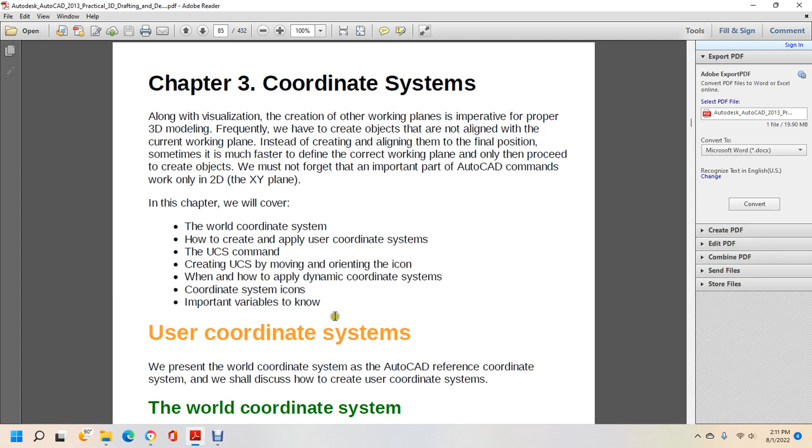The user coordinate system: we present the world coordinate system as the AutoCAD reference coordinate system. We shall discuss how to create the user coordinate system.

The world coordinate system, also known as World or WCS, is the reference coordinate system. It can never be deleted or modified, and all user coordinate systems are based on this one.

When we create an object, it will be internally defined with the world coordinate system, even if it is not the current coordinate system. The world coordinate system is also used for exporting 3D projects to other formats.

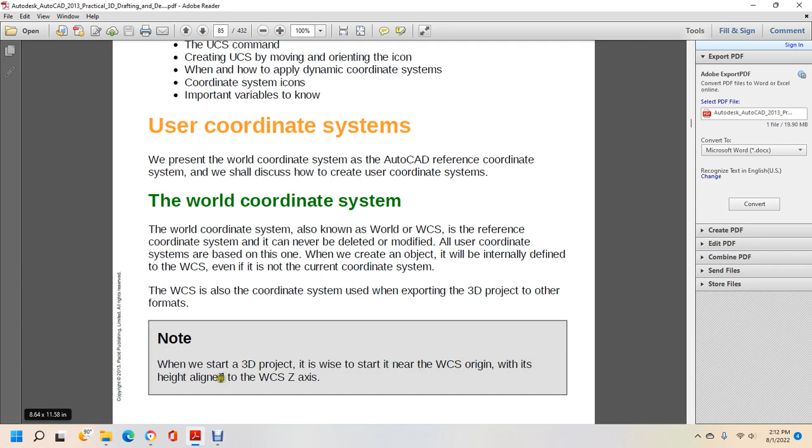Note: when we start a 3D project, it is wise to start it near the world coordinate system origin, with its height aligned with the world coordinate Z-axis.

Creating user coordinate systems. Following are important commands and variables related to the user coordinate system, also known as UCS or user coordinate system. The main command is aptly named UCS. The user coordinate system command has no alias, but easily allows you to create and manage a user coordinate system.

There are several options to the user coordinate system. You can access the user coordinate system toolbar by going to Tools, New User Coordinate System on the menu bar, with the Coordinates panel on the Home tab of the ribbon, or right-click on the User Coordinate System icon. The command can be seen with the command line informed of the current user coordinate system.

By default, it creates a user coordinate system defined with 3 points, starting with a new origin. The command is UCS. Current UCS named World. You can specify the origin of UCS, or options: Face, Name, Object, Previous, View, World, X, Y, Z, ZAxis, or World. Point.

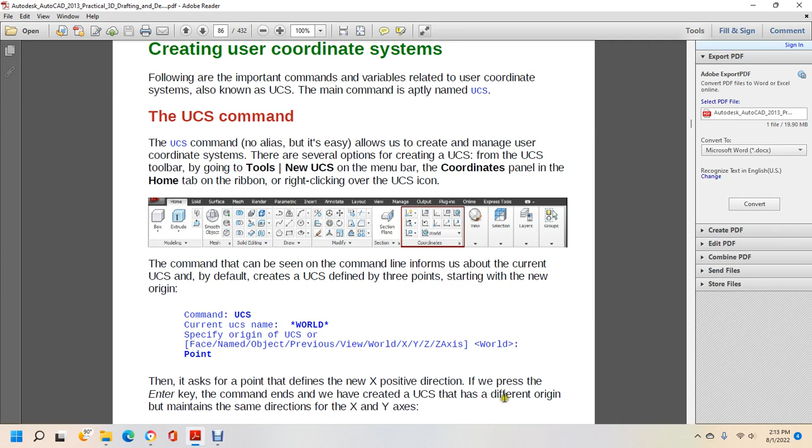Then it asks for a point that defines the new X positive direction. Pressing the enter key proceeds, and the command ends, creating a user coordinate system that has a different origin but maintains the same direction on the X and Y axis.

Specify point on X axis or accept. Point. When these two points are defined with the origin, an infinite number of planes are possible, so you need to specify a third point to define the X and Y working plane.

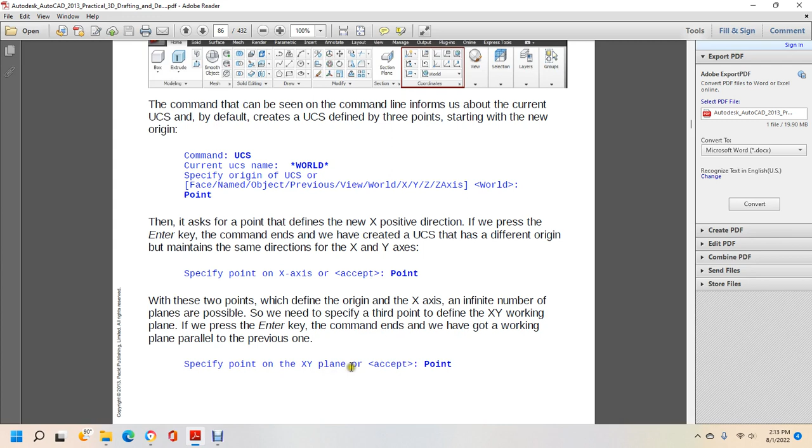If we press the enter key, the command ends, and we get a working plane parallel to the previous one. Specifying point on the X and Y plane, or accept point.

Now you see the world coordinate system: the X, Y, and Z is now positioned on the direction of the 3D triangle. We must be very careful when clicking on these points.

Be sure that the correct object snap is assigned. Working with a wrong user coordinate system that is not immediately detected can cause serious problems.

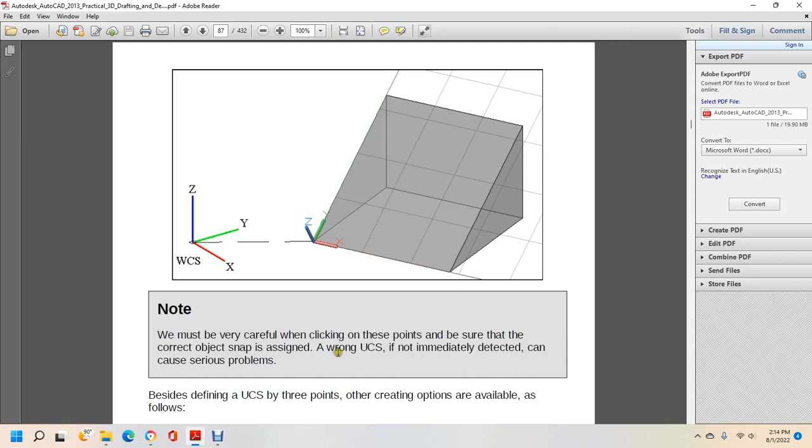Besides defining the user coordinate system by 3 points, there is another creating option: the Face variable, which allows you to create a user coordinate system aligned with any planar face, solid, surface, or mesh. We click inside the face and it will define a user coordinate system.

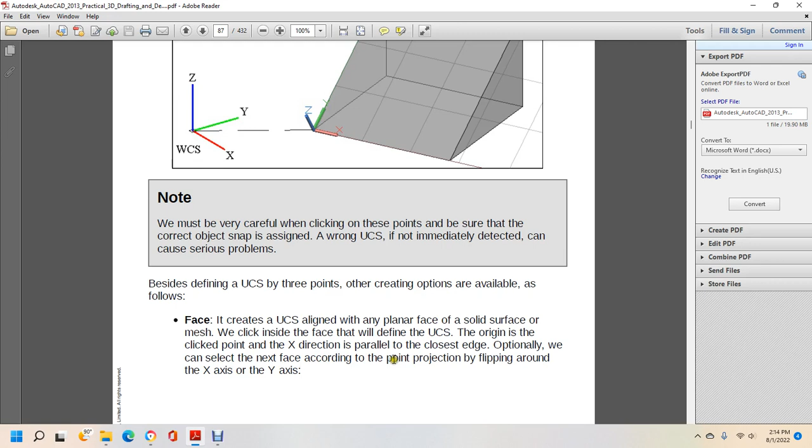The origin is the clicked point, and the X direction is parallel to the closest edge. Optionally, we can select the next face according to the point projection, flipping around the X or the Y axis.

Object creates a user coordinate system defined with the existing object. Selecting the line creates the user coordinate system parallel to the one used to create the line, with the origin at the endpoint close to the selection point, and the X axis given by the line.

View creates a user coordinate system perpendicular to the view direction, meaning the X and Y axis are aligned with the drawing area. The origin does not change.

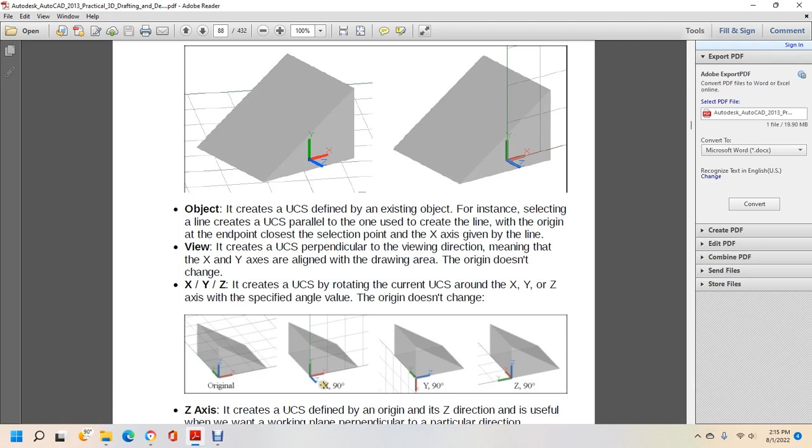Z-axis creates a user coordinate system defined by origin and Z direction, useful when we work on a plane perpendicular to a particular direction. Previous option activates the user coordinate system that was last used.

This option can be used successfully to recover the last 10 user coordinate systems. It's also possible to save and recover user coordinate systems by applying a name, with a new set of options.

Save, to save a user coordinate system - the name is requested. Restore, to activate a saved user coordinate system - the name is requested. Delete, to eliminate a saved user coordinate system definition. And question mark, to list all saved user coordinate systems.

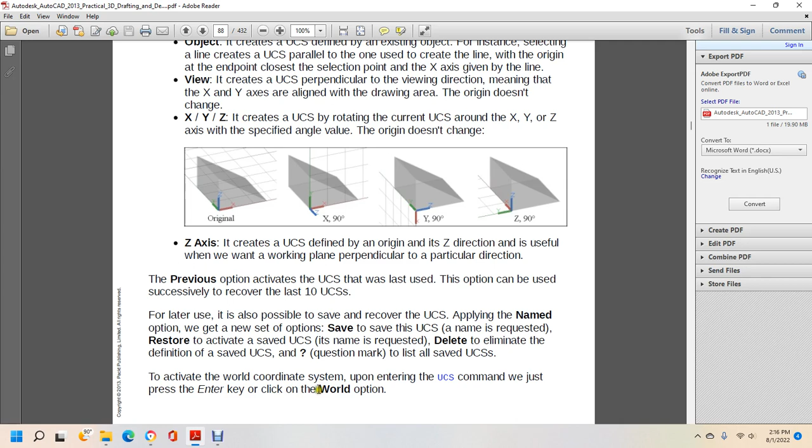To activate the world coordinate system upon entering the user coordinate system command, we just press the enter key or click the world option. Note this command has two hidden options.

Orthographic option allows activation of the orthographic user coordinate system related to the world coordinate system, obtained by rotating it and equipping the user coordinate system with the following options: Top, bottom, front, back, left, right - and top is the default.

Creating a user coordinate system by moving and orienting the icon. Since version 2012, it has been possible to create a user coordinate system by moving and orienting the icon directly, selecting the icon and four grips are displayed within the 3D view.

One grip is on the origin, and the other three are on the axis endpoints. With these grips, the coordinate system can be activated, moved, and dynamically created.

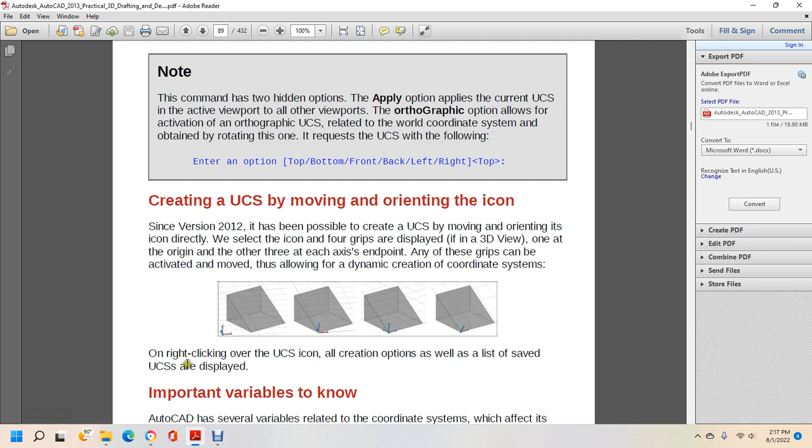Right click over the user coordinate system icon, all creation options, as well as listed saved user coordinate systems that are displayed.

Important variables to know: AutoCAD has several variables related to the coordinate system which affect its behavior when creating a user coordinate system or changing the view direction. Here are the most important ones.

User coordinate system follow, or UCSFOLLOW. On activation of a user coordinate system, the view changes to the respective plane view, keeping the value of UCSFOLLOW as 1. With a value of 0 by default, it is saved with the drawing.

User coordinate system viewport, or UCSVP. When working with more than one viewport, this variable allows for an independent user coordinate system per viewport at value 1, or only one UCS for all viewports at value 0. It has a default value of 1, saved in the drawing.

User coordinate system ortho, or UCSORTHO. It controls whether the corresponding orthographic UCS is activated, at value 1, or not, at value 0, when changing the view to an orthographic view. It has a value of 1 by default and is saved in the registry.

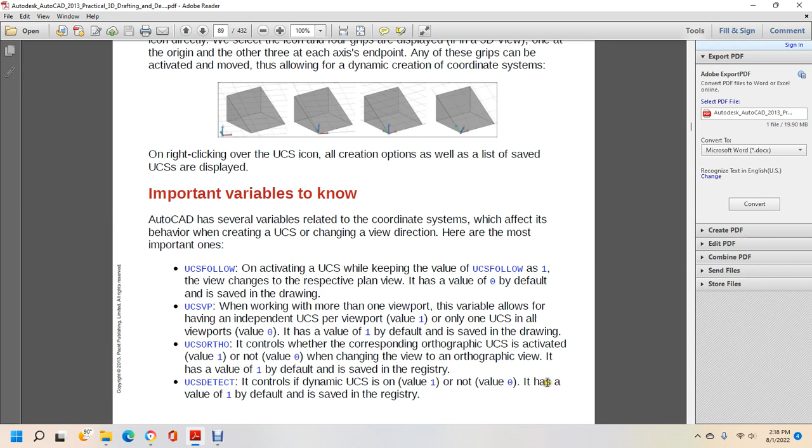User coordinate system detect, or UCSDETECT. It controls if dynamic user coordinate system is on, at value 1, or not, at value 0. It has a value of 1 by default and is saved in the registry.

User coordinate system select mode, or UCSSELECTMODE, controls whether the user coordinate system icon can be selected, moved, or oriented, at value 1, or not, at value 0. It has a value of 1 by default and is saved in the registry.

Exercise 3.1: while drawing some linear objects on different planes of a 3D model, open the accompanying file A3D_03_01. This part's planes are not aligned with the world coordinate system. Create a user coordinate system aligned with the front face.

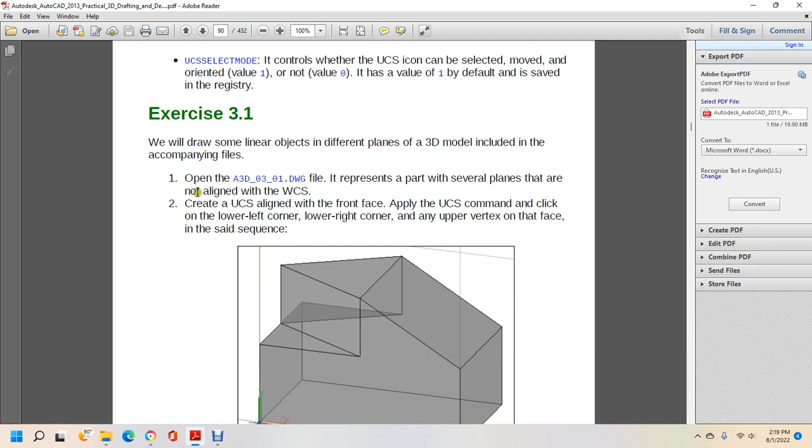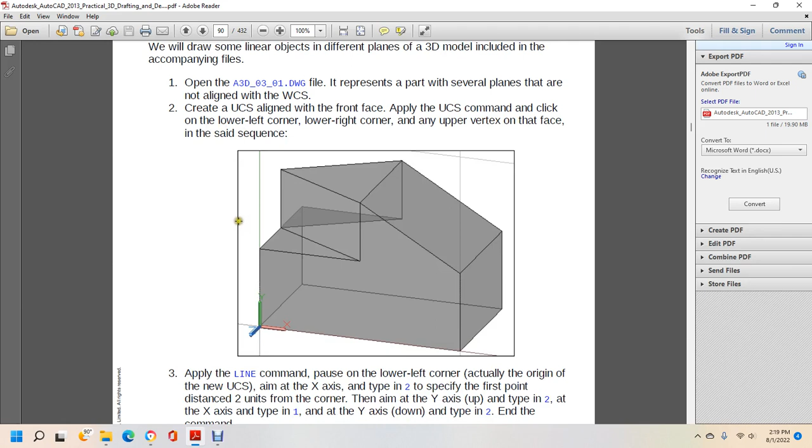The user coordinate system command. Click the lower left corner, the lower right corner, and the upper corner on the face in that sequence. Apply the line command. Pick the lower left corner, the actual origin of the new user coordinate system.

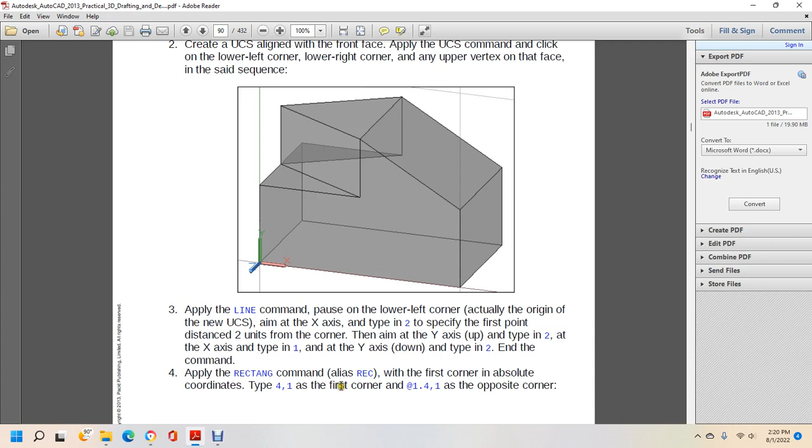Aim the x-axis, type in 2, specifying the first point at a distance of 2 units from the corner. Then aim the y-axis up and type 2. At the x-axis, type 1, and y-axis down, type 2. Then apply the rectangle command, alias REC, with the first corner at absolute coordinates 4,1 and the opposite corner at @1.4,1.

Create the user coordinate system aligned with the right face again using the 3 points. Apply the rectangle command to create the rectangle from 1,1 absolute coordinates to @4,1 relative coordinates. Now activate the user coordinate system icon, position and orient it with the top inclined face by moving the grips. Users of versions older than 2012 should apply the user coordinate system using the 3 points again.

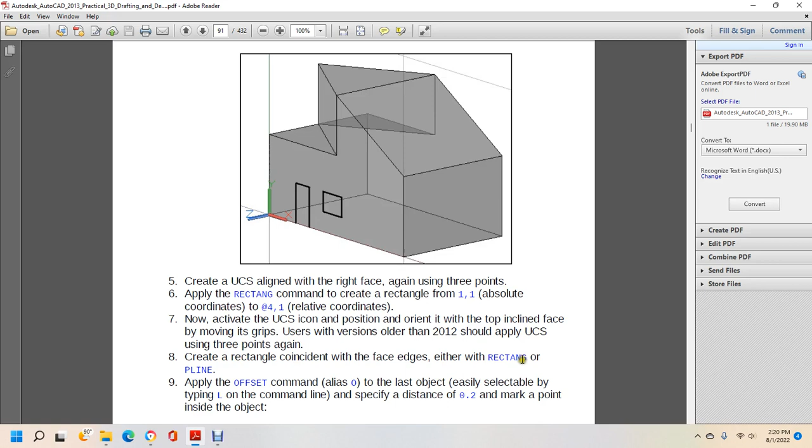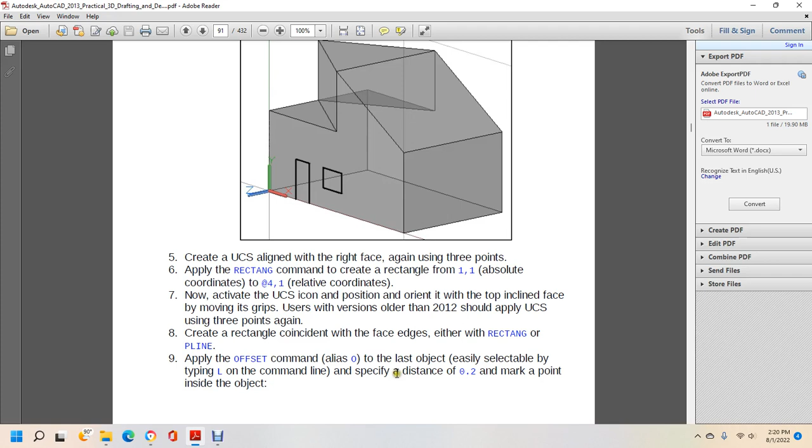Create a rectangle coincident with the face edge with the rectangle or the polyline. Apply the offset command, alias O, with the last object, easily selectable by typing L on the command line. Specify the distance as 0.2 and mark a point inside the object.

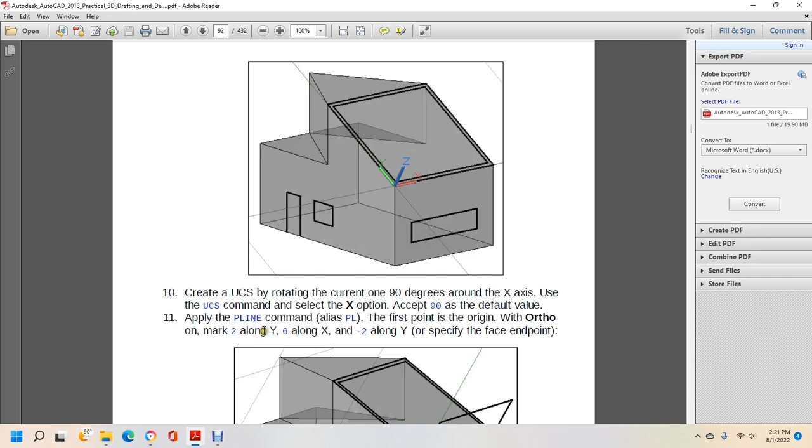Create the user coordinate system rotating the current one 90 degrees around the x-axis. With the user coordinate system, select the x option, accepting 90 degrees as the default value. Apply the polyline command, alias PL, for the start point at the origin, with ortho on. Mark 2 along the y, 6 along the x, and then -2 along the y, on the face endpoints. Save the current user coordinate system with the name top perpendicular.

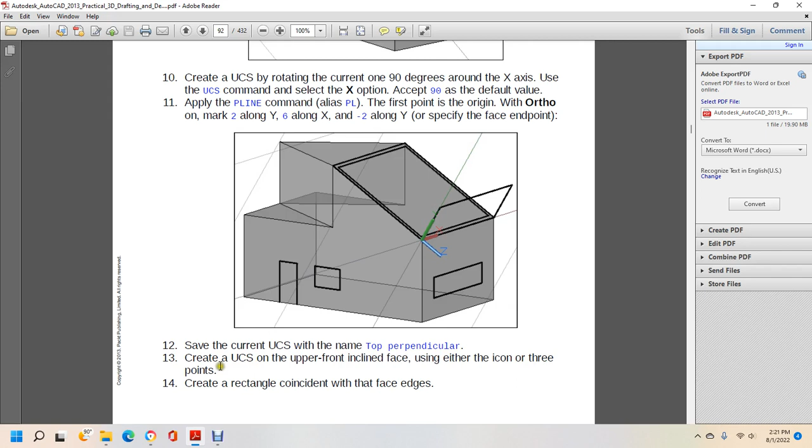Create the user coordinate system on the upper front inclined face. Use either the icon or 3 points. Create a rectangle coincident with the face edge. Apply the offset command, alias O, last object. Specify the distance as 0.2. Mark a point inside. Do the same with the upper posterior inclined face.

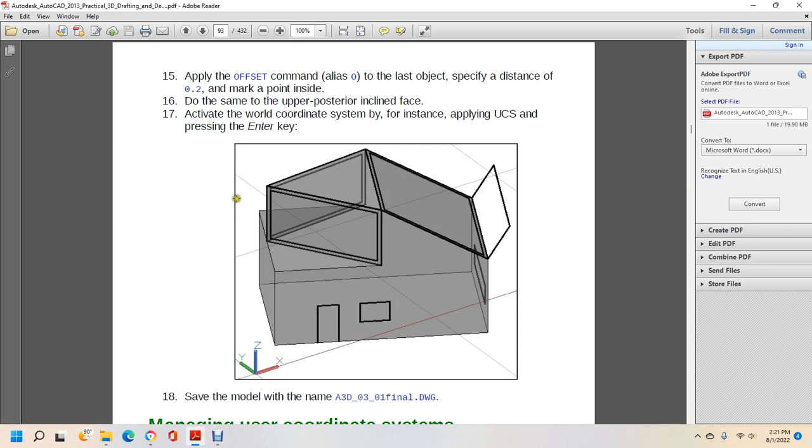Activate the world coordinate system, for instance applying the user coordinate system command and pressing the Enter key. Save the model, renaming it A3D0301 final drawing. Managing the user coordinate system.

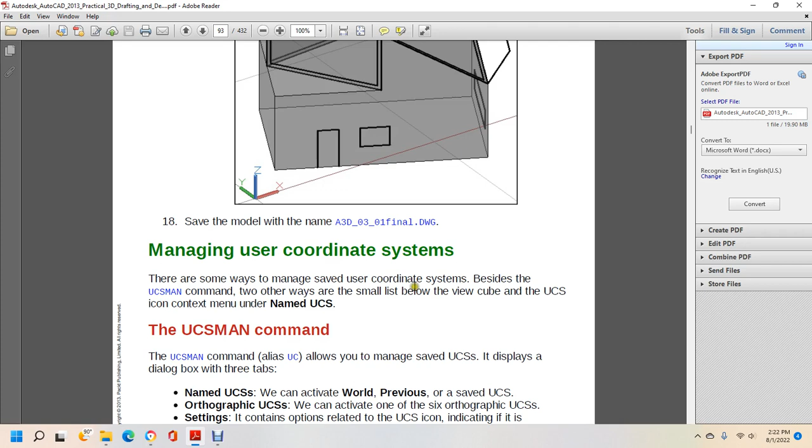There are some ways to manage saved user coordinate systems besides the UCSMAN command: the UCS manager command. Two other ways are the small list below the view cube and the user coordinate system icon context menu, named UCS, or the UCS manager command, UCSMAN.

The user coordinate system manager, alias UC, allows you to manage the user coordinate system display with a dialog box with 3 tabs. Named UCSs: we activate the world, previous or saved user coordinate systems. Orthographic UCSs: we activate one of the 6 orthographic user coordinate systems. Settings:

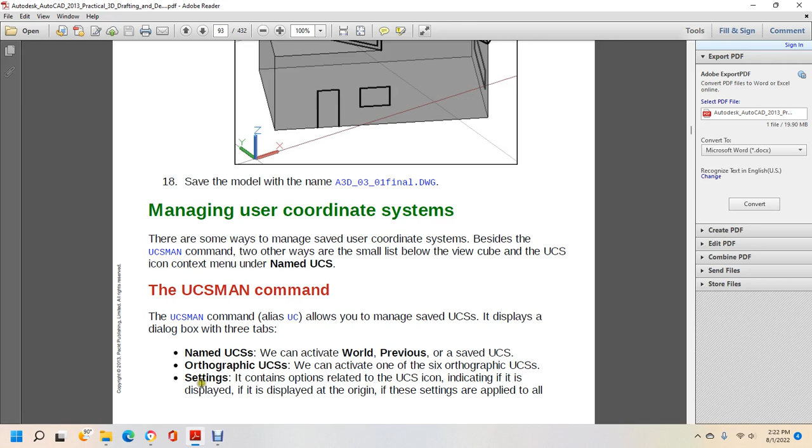we can change the display options related to the user coordinate system icon, indicating if it displays at the origin, if the settings are applied to all viewports, and if it is selectable. It also contains 2 options related to the user coordinate system: saved with the viewport, and whether the plan view is activated when changing the user coordinate system.

Dynamic coordinate system. Since version 2007, an auxiliary tool is available for creating objects on a solid planar face: creating a dynamic coordinate system. The dynamic user coordinate system tool is activated during the creation of a 2D or 3D object when you move the cursor over a solid planar face. The face is highlighted and AutoCAD creates a temporary working plane on the face; at the end of the command the temporary user coordinate system disappears.

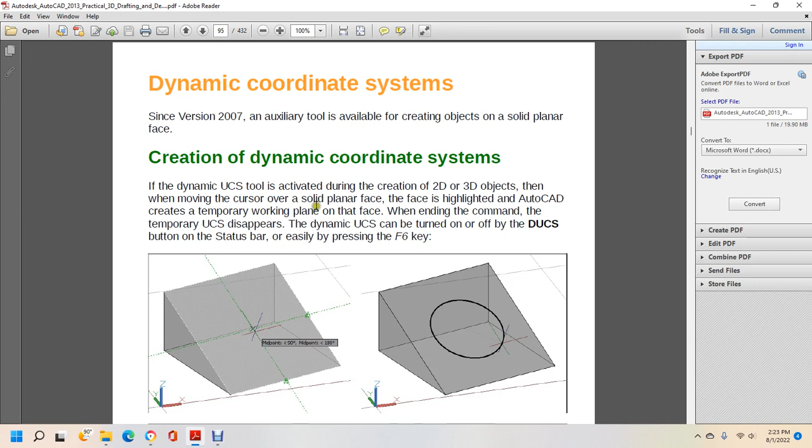Dynamic user coordinate system can be turned on and off with the DUCS button on the status bar or easily by pressing F6. Note, normally the object positioned on that plane is not precise in distance from an edge or a vertex. One way to have precision is to turn on OTRACK, then pause over one of the object snaps in the direction of the cursor.

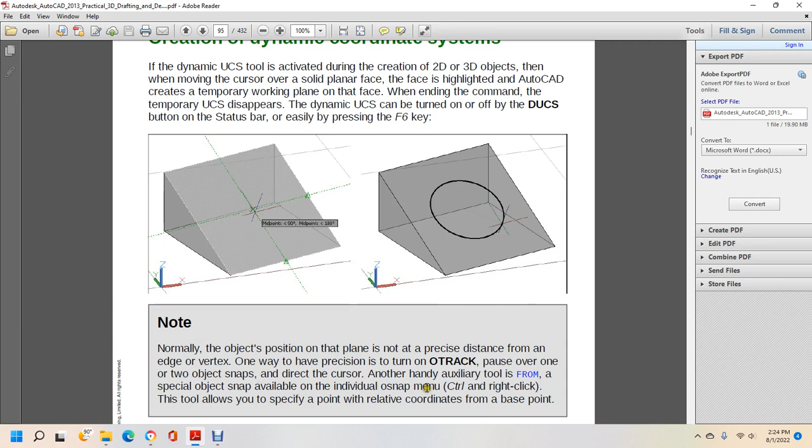Another handy auxiliary tool is the FROM special object snap, available with the object snap menu, Control right click. This tool allows you to specify a point relative to coordinates from a base point.

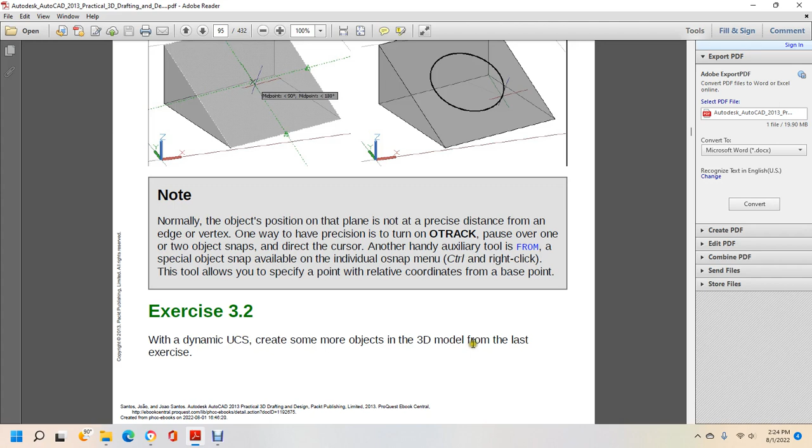Exercise 3.2. With dynamic user coordinate system, create some more objects on the 3D model from the last exercise. Open the A3D_03_02.DWG file. Turn on dynamic user coordinate system. Create the circle and the rectangle on the front and left face. Create the square of side 1 on the upper inclined face, with the lower left corner offset from the inner rectangle 2 units horizontally and 1 unit vertically.

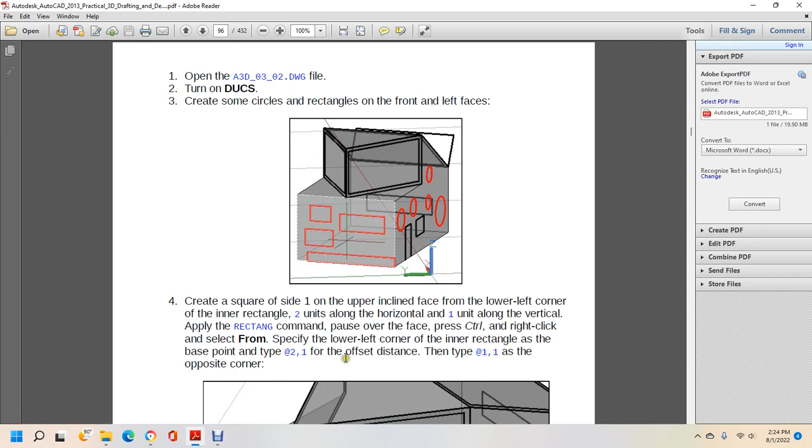Apply the rectangle command, pause over the face. Press Control right click and select From. Specify the lower left hand corner of the inner rectangle as the base point, then type @2,1, 2 in X and 1 in Y for the offset distance. Type @1,1 as the opposite corner. There is no need to save the model.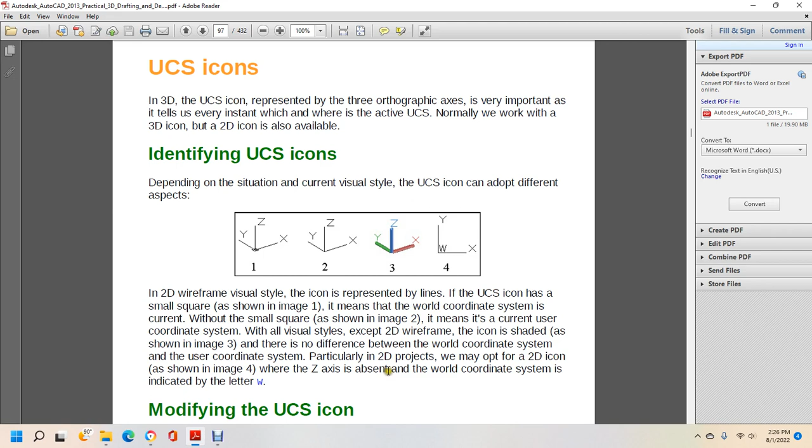Particularly for 2D projects, we may opt for the 2D icon as shown in image 4, where the Z axis is absent and the world coordinate system is indicated with the letter W. Modifying the user coordinate system icon. To modify it, we can apply the UCSICON command. It has the following options: On and Off turns the icon visibility on and off in the current viewport. All applies the visibility and origin settings to all viewports.

Noorigin or Origin controls display of the icon at the coordinate system origin. If the origin is not visible in the current viewport, the icon is displayed at the lower left-hand corner. Selectable specifies whether the user coordinate system icon is selectable or not. This option is available in the 2012 version.

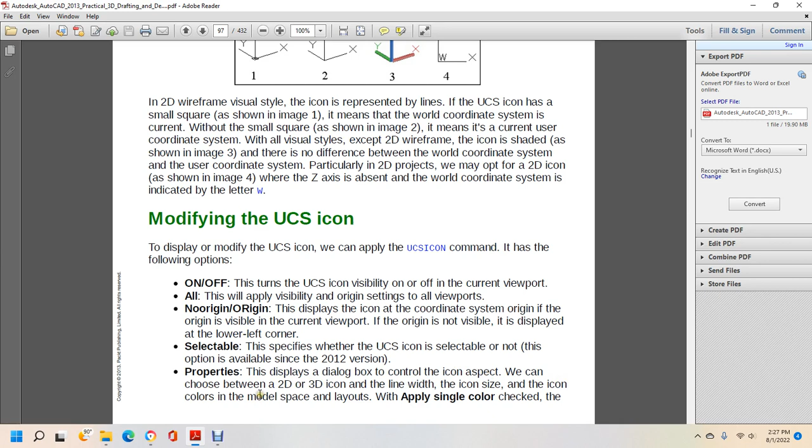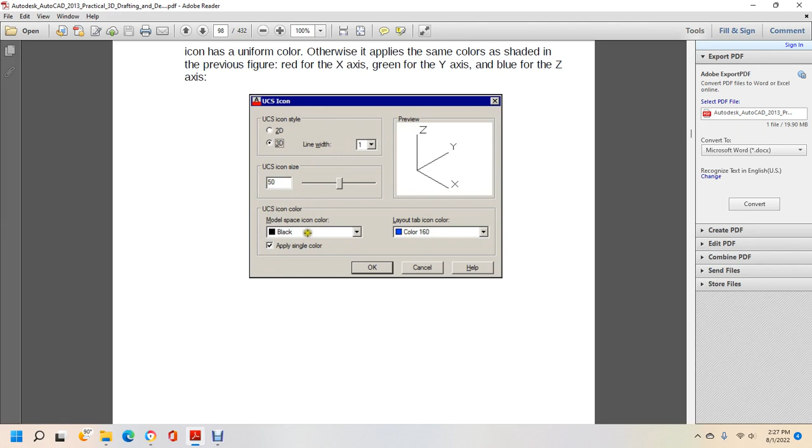Properties displays the dialog box to control the icon aspect. We can choose between the 2D and 3D icon, the line width, the icon size, the icon colors in model space and layouts, and apply single color. If checked, the icon has a uniform color, otherwise it is shaded as in the previous figure, with red for the X axis, green for the Y axis, and blue for the Z axis. This shows the UCS icon dialog: 2D, 3D, line width, icon size, model space color, layout color, apply single color, OK, Cancel, or Help.

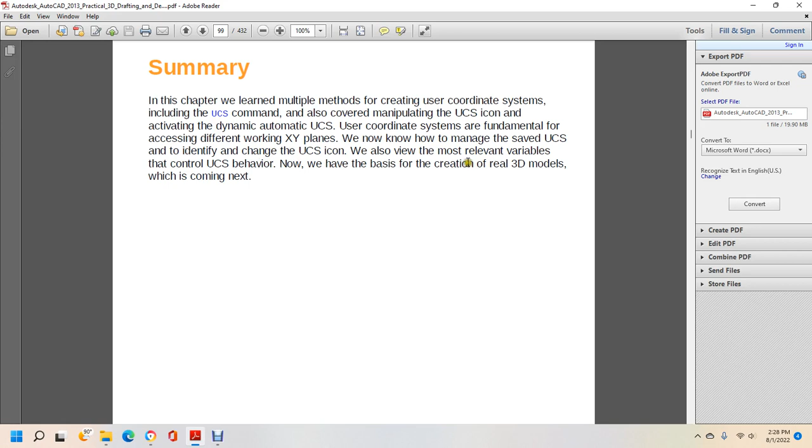Summary. In this chapter, we learned multiple methods of creating user coordinate systems, including with the UCS command. We also covered manipulating the UCS icon and activating the dynamic UCS. The user coordinate system is fundamental to access different working XY planes. We now know how to manage the saved user coordinate systems, identify and change them, and the most relevant variables to control them. Now we have the basis for the creation of real 3D models, which is coming next.

Alright, Chapter 4, Creating Solids and Surfaces from 2D.